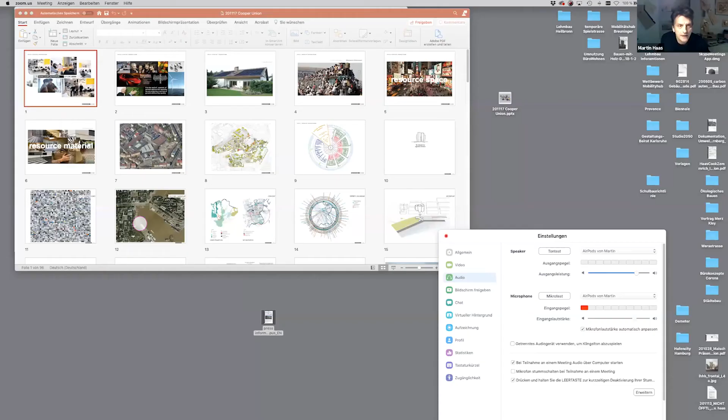Okay, trying to solve the technical issues. Do you see my screen? Yes, okay, it works. Before we start, maybe everybody could mute the mic, so Martin would not be interrupted. No, you can interrupt at any time you want.

So guys, first of all, thank you very much for the invitation, and thank you for organizing everything, Thorsten. It's a pleasure. I want to quickly speak about the office, what we do, how we approach things, and why.

Thorsten asked me about the 2050 in our name, Studio 2050. It's to remind ourselves that in 2050, all the governments have labeled the year when we should have achieved carbon neutral status for society. It's a big challenge—only 30 years left. When you hear about the issues we have to solve to focus on this aim, you'll know how little time we have left to proceed toward a carbon neutral future.

We have 3 partners, shown bottom right: David Cook, Stefan Zemrich, and myself. We have roughly 30 architects here in Stuttgart, and a branch in Shanghai, which developed out of a former student I had in Pittsburgh. He worked in the office and then went back to China. So we work internationally on sustainable architecture.

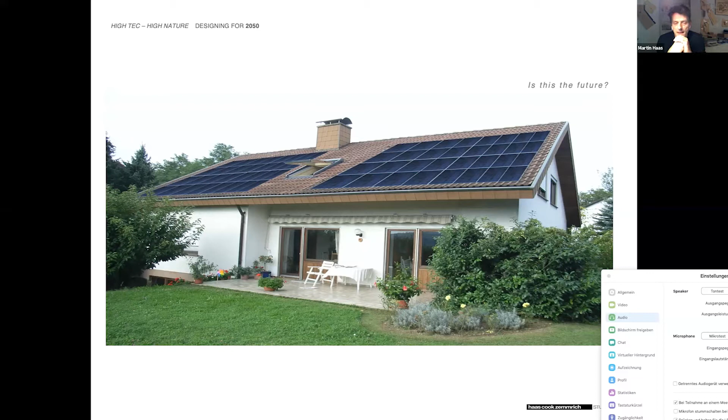I think in recent years we focused just on solving our energy issues. So we generated more efficient buildings, but we haven't asked ourselves if this building in general, if this single house, is the right attitude for this kind of society, or if we have to challenge the building itself before we transform energy consumption in a better way. These are big questions we have to look more deeply into.

So what does that mean for architecture? It means that when we talk about architecture, we have to address first that it should make sense to build the building, and it should provide usage for as many people as possible, considering 24 hours a day, 7 days a week. If a building is really used like that, then it made sense, and it was worth constructing. That's the effect of our buildings.

The first resource we have to talk about is space itself. We have one planet. We have only 2,000 square meters per person if we talk about 9 billion people on the planet. So we have to condense, and we have to use as little space as possible to provide as much quality as possible to people.

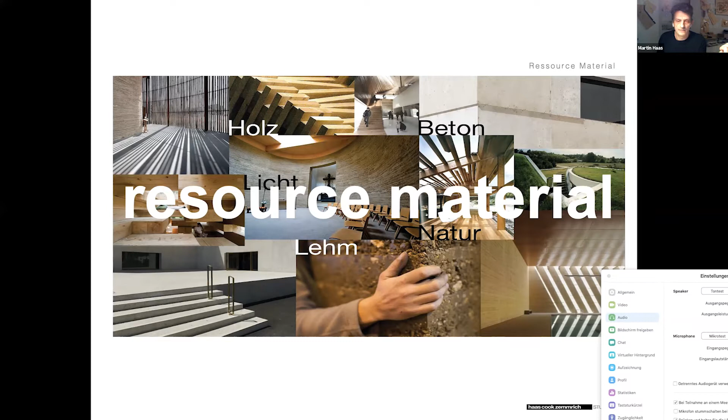So space, in terms of usage, and time, is for me a criteria for developing new architecture. And if you solve the first questions for a building - that it makes sense, that it provides as much attraction as possible to many people throughout the whole day - then it comes to how you realize it, to the materialization questions, and how to use as little materials as possible while dealing with the resource of materials quite well. I want to show you what that means.

We were asked to redevelop this former industrial site in Stuttgart. In all these buildings, which were asked to be demolished, there's so much embedded energy installed that it makes sense to question first and foremost whether it makes sense to deconstruct, or not to keep the building, to keep the structures and the embedded energy, and to gain extra value from that site.

So what we did was overplan the existing and redensify it, searching for new qualities by using all the roofs, using every square meter of space in different manners. A square meter of kindergarten space could be used for elderly people in the afternoon hours - we have a lot of shared communities, shared usages, to have a 24-hour, 7-days-a-week used architecture all the way through.

And if we add new structures, we certainly do that in a way that materials are better dealt with - so we use wood or renewable construction materials. All the rooftops are there for greenery, food production, microclimatic issues, to develop a better way of living in this dense urban environment.

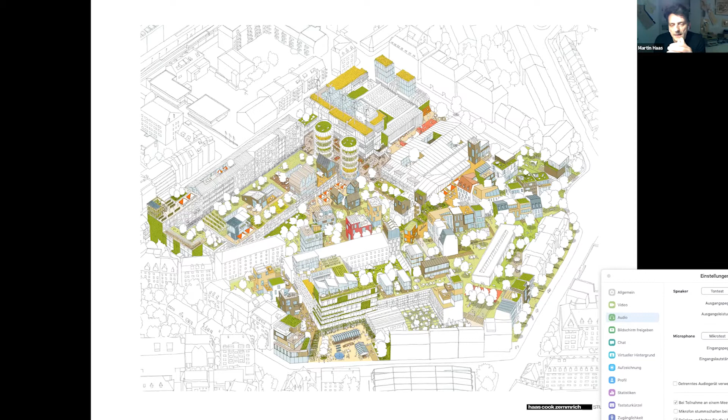Embedded energy, the usage of materials, the synergies of different structures - all of that needs to be considered. You can guess that this is a very complex approach, and therefore I'm happy that I was asked by Thorsten, and that I can share my lecture with Thomas, because I strongly believe in the integral planning approach. As an architect, that's a bit too much - you can't solve all these aspects as a single person. You have to work in a team with a couple of experts. I very much appreciate this approach, that we cooperate from the very beginning with Thomas and Thorsten to think through all these new innovative approaches for architecture from scratch.

As I started my lecture, there is this kind of different criteria we dealt with in the past about efficiency. We dealt at the very beginning only with the energy factor. Then we asked ourselves, can we reduce the amount of water? Can we reduce the amount of material embedded in the buildings? Can we reduce the amount of space we use? Can we reduce the mobility, or can we work with a more efficient, more sustainable approach into mobility?

That's the first phase, how do you say, the... Thomas, give me the word for that. That's the first phase of this holistic approach into sustainable architecture.

But when it comes to a carbon neutral future, we also have to address the way we live. So it's not anymore anything we can just plan. It's also the way we share, we deal with the structures. It's the question of how much, where the food is coming from, how do we deal with our travels, the consumption of materials. So you see easily that when we talk about a new approach to a carbon neutral future, it's also a question of ethics. It's the question of how we can steer our social environment in a better way.

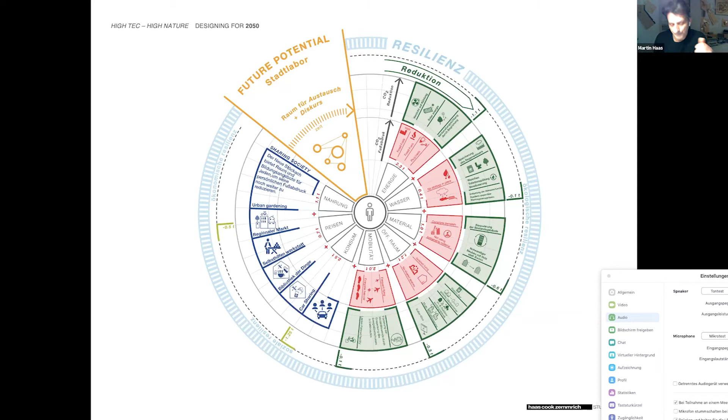How we approach that when it comes to a building: we were lucky in a submission for a competition asked by the Guggenheim Foundation in Helsinki, to team up and finalize in the last round of six architects. There we first searched for the possible dimension of a building at the site at the harbor front of Helsinki, because there the Guggenheim Foundation asked for a new museum, and they reserved a huge part of this existing industrial harbor.

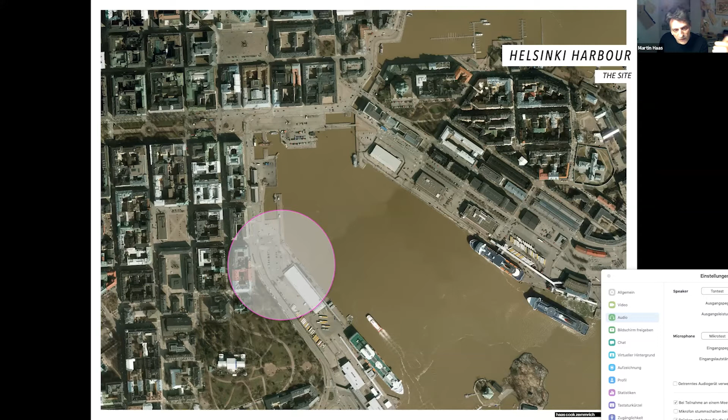We said, does it make sense to make that building like a museum, which is also just a 9-to-5 usage, or would it make more sense to shrink the place for that museum and allow the city to grow in future in different ways, because nobody knows what the future is asking for. So maybe it makes sense to shrink the place for a museum to allow the city to develop in other ways in the future. So we also searched together with urban planners for the need of additional features in the city.

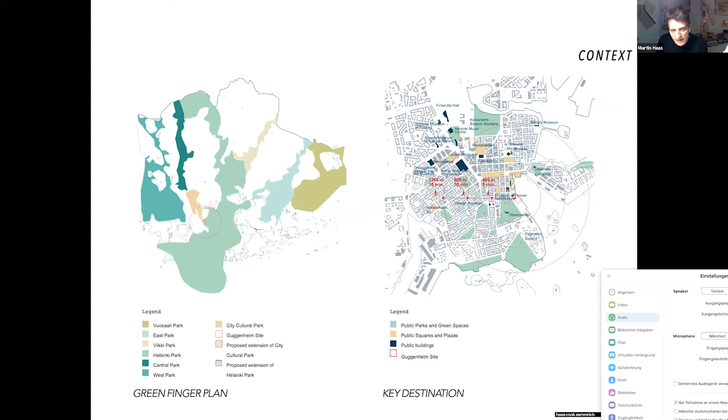We said, what kind of qualities can this museum provide beside being a museum for art? So we looked into the event calendar of Helsinki over a year, and we realized it would be an additional quality if we could address an open public space accessible for everybody, not only for the museum's visitors — a public place sheltered against the strongly easterly cold winds in Helsinki. It's quite a cold place in winter times. They hardly have sun, so they celebrate the spring period when the sun is coming back.

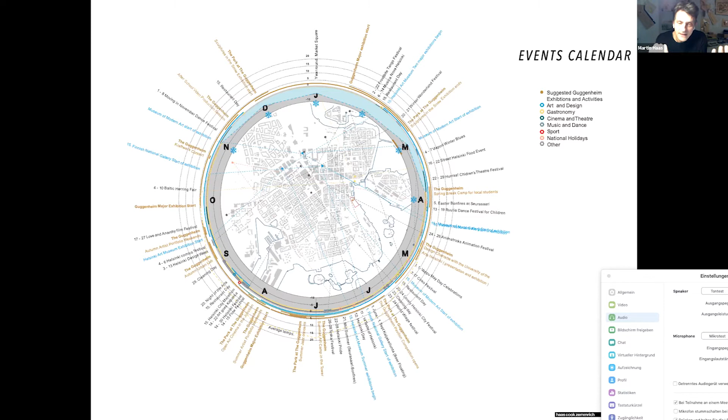So we said it would be great if we could provide a place where they can celebrate the beginning of spring, have a sheltered outdoor area with a lot of solar hits, celebrating the light as a quality, because light is a missing quality in that city.

There we focused our design on shaping the museum into high tower structures to shrink the footprint of the building, and then the towers themselves, the single tower spots, we modulated in a way that we have solar hits through these towers into the public space in the middle of that solar henge. So you see it here.

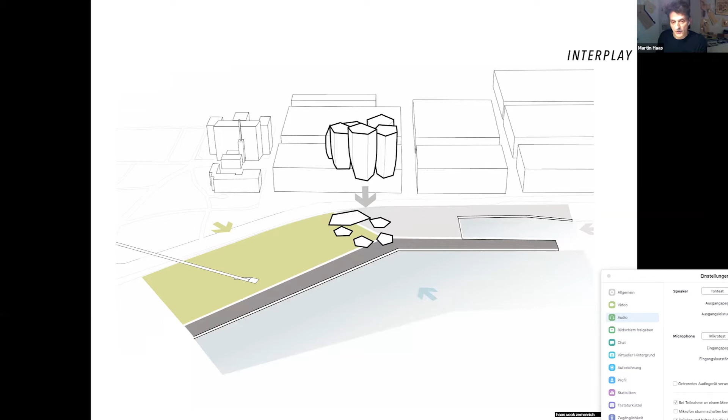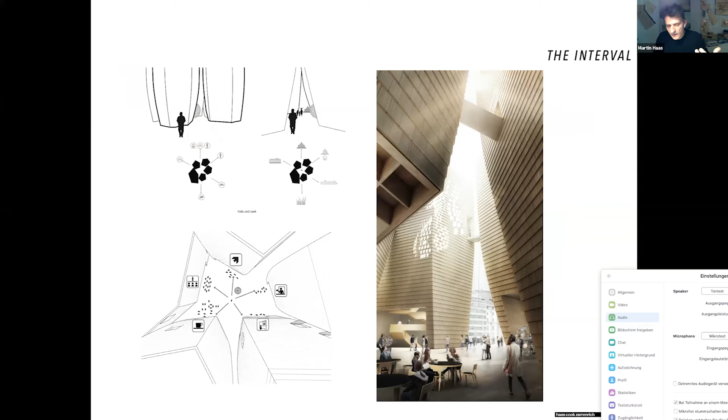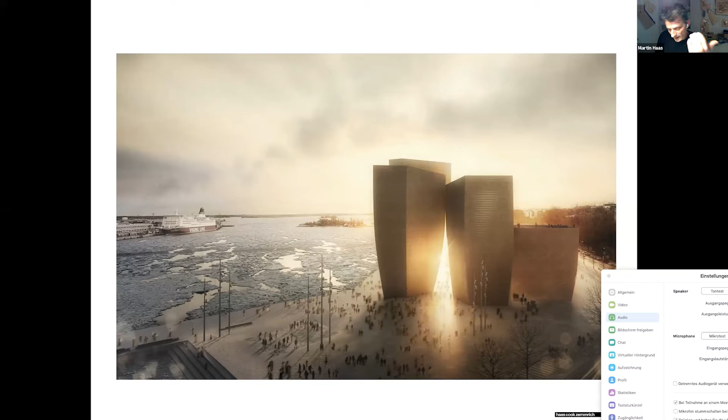Then we said, okay, we produce this place, a public area, a place for gathering, for interaction, and we generate a kind of chandelier in the middle where solar hits can celebrate lighting conditions, allowing for these kinds of situations. That's an image from the 21st of March, the beginning of spring, where a festival of sun could happen at that place. We searched for different qualities we can provide beside the museum. So we asked ourselves, what would we do spending 24 hours around that building, providing viewing platforms.

We had a garden next to the museum, providing extra space. The garden was an area where the city could develop differently in future. So it was all about reducing the resource of space, maximizing the usage of that building.

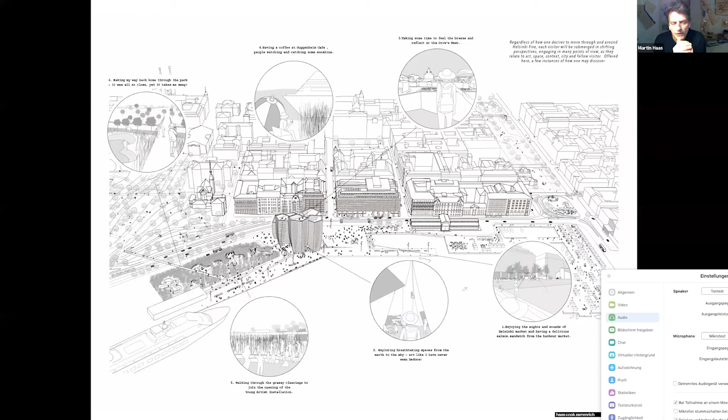With that came an approach where we wanted to develop towers out of wood. We worked on a very innovative wood structure together with Thorsten and his team, wanting to show society that a 45-meter high wood tower is possible.

Inside the museum, movable platforms allow artists to reshape the areas, because I believe that I'm an architect—I only have one brain, so it helps to ask artists to change the room layout over time, to provide as many different room atmospheres as possible. It would be great if artists could tell me the platform for their exhibition should be on level 1, and for the next exhibition we want a smaller space. That was part of this vertical white cube, or wood cube, providing an extra venue for exhibition.

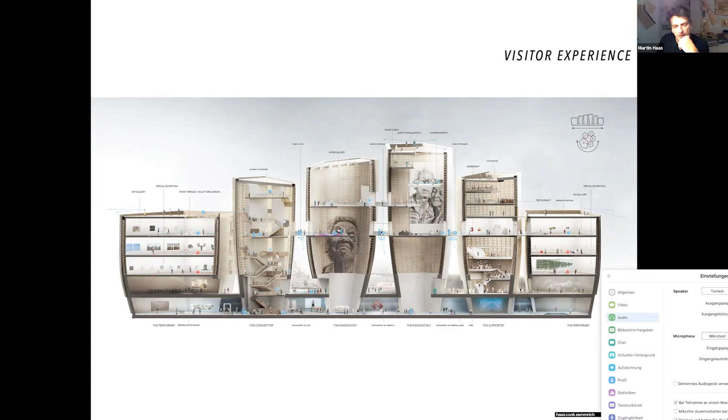So when you solve the question properly, you produce a space which could be used by different persons. When it comes to materials, we also realize that natural materials have two positive effects.

The first is certainly that we save resources, but the second is that they generate an emotional link to people. People like natural materials, they know them from nature. It's a very old, basic kind of relation you have with all the elements you see on a daily basis. This emotional link helps very much so that people appreciate buildings. I think for a sustainable approach, durability is also a very important aspect, and durability means that people like the buildings and want to keep the structures for a long period. That's something we shall not forget—natural materials can provide this emotional link.

When we develop houses, we ask ourselves first and foremost: what would we do if there wouldn't be any energy at all? It's a very simple approach—all architects for the last 2,000, 3,000 years worked like that. But we forgot all these passive measures about orientation, the right placement of a building, the amount of windows we need for daylight without solar heat gain, and what it means to protect against the rain. That is the new simplicity we very much like to approach with.

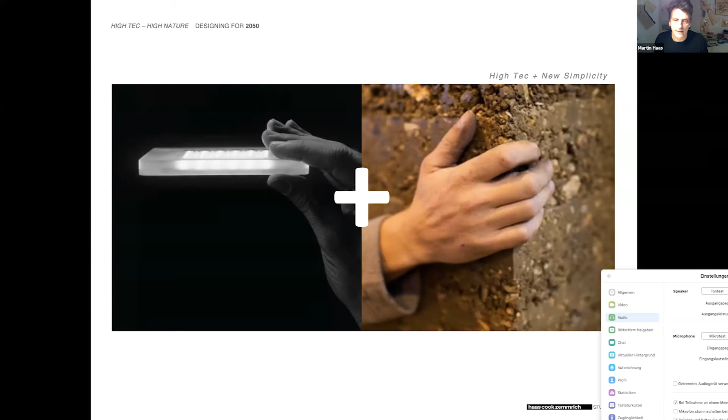That leads us to Alnatura, the building we want to talk about, because all these aspects I mentioned were embedded in this approach. We had a...

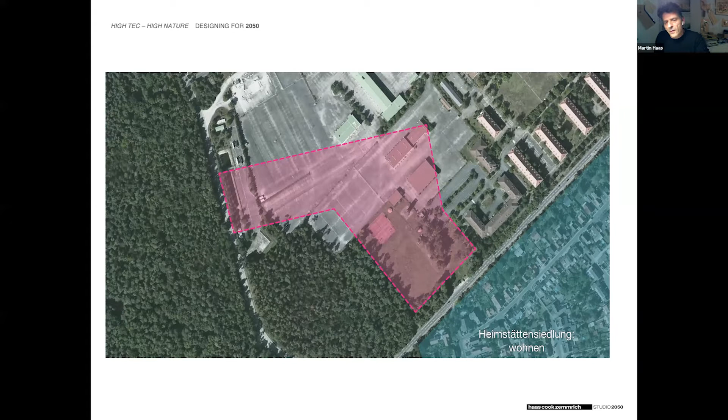The site is in a midtown area of Germany. It was a former military camp—you can see the paved structures, the military barracks, here. It's in the perimeter of a city, close to a forest. Transforming a former military site in Europe is a very big thing right now, because you can densify cities and stay close to all the infrastructure facilities the city provides. It's a plus, and it's no longer in use. We appreciated this approach very much.

Our first consideration was: if that is the site, let's figure out what we can build there, maximizing use of the microclimatic conditions we find in the immediate proximity. How can we reuse what we find on site, and how can we maximize our carbon-neutral or microclimatic qualities back to the area?

Wait a second, I have a technical issue.

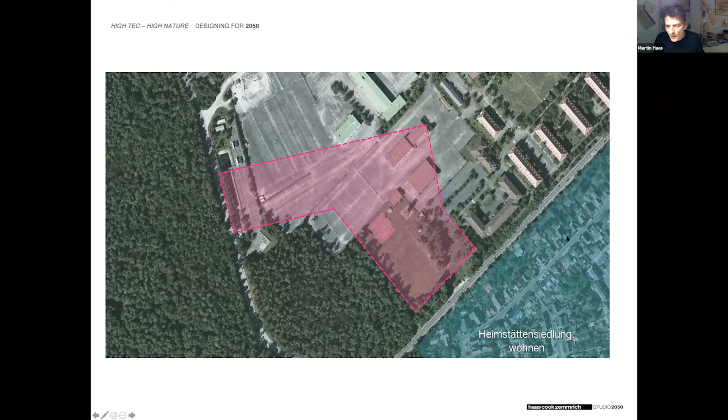We started with a simple fact sheet. We said, okay, let's base everything on a couple of aims, of targets: optimized use of the microclimatic conditions, and the choice of materials through a process of life cycle analysis.

That was something we couldn't do ourselves, so we were happy that Thomas and his team at the university in Munich helped us develop criteria for designing an optimized building envelope, resulting in reduced consumption of materials. That's also something you can't do yourself as an architect - you have to have a good planner aside, and that was Thomas and his team, also energy consultants.

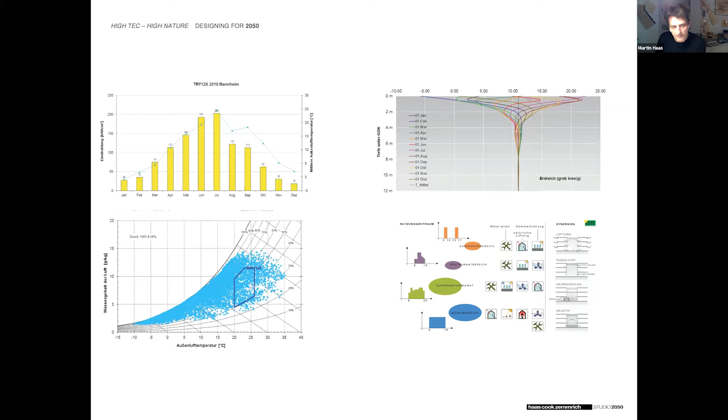Employment of natural and renewable building materials - it sounds simple, but it wasn't that simple. Thomas will talk about that in more detail, so I'll go over it. We looked at what kind of potential we find on site: solar hours, geothermal potential, etc.

We did a couple of different model approaches with all these criteria embedded, and we finally ended with a very simple barn approach - a simple structure oriented east-west.

The reason for that was we wanted to have maximum north light. North light is good light - it's an even light, less solar hits. The main issue for a working environment area is you always have so many energy materials, computers, a lot of heat gains in the building. So you want to have as little heat as possible, and maximum daylight in order not to turn on your artificial light easily. So north light is good.

Therefore we cut the roof - you can see that in this working model. We lifted the elements, the levels, to have a high level. The high level allows maximum daylight to hit the depth of these plates, giving a little envelope with maximum usage of square meters under high potential daylight conditions.

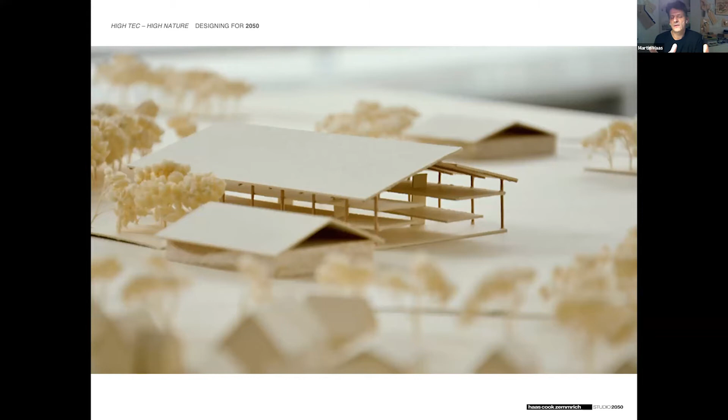Then we started working together with Thomas and with Thorsten to work this conceptual, diagrammatic architecture into detail. We said, okay, we use the air from the close by forest on the western side. A forest is a perfect clean air venue - in the summer the leaves provide shade, evaporation cools down the air. So we use that, and we suck in the air and bring it to an air duct.

You see the air duct in the diagram at the bottom. We bring it to the inside of the building, then use the natural chimney effect in the atrium. What does that mean? The air gets warmer, warm air rises up, and therefore we have a natural movement of fresh air brought into the building by no other means. So that was the air duct and the natural ventilation aspect.

Then we said the south-orientated roof is perfect - we can use that for photovoltaic cells so that we can provide our own energy on site. Then we said we'll save and store every cubic meter of water we can get on that facility, and we put that in an open lake on the south side of the building.

The open lake helps cool down the area further. Through evaporation we can influence the microclimatic conditions, especially on the south side where we have a lot of solar gains usually. The green part gets very close to the house, so we get rid of paved structures as much as possible - also a microclimatic enhancement by not having too many paved surfaces.

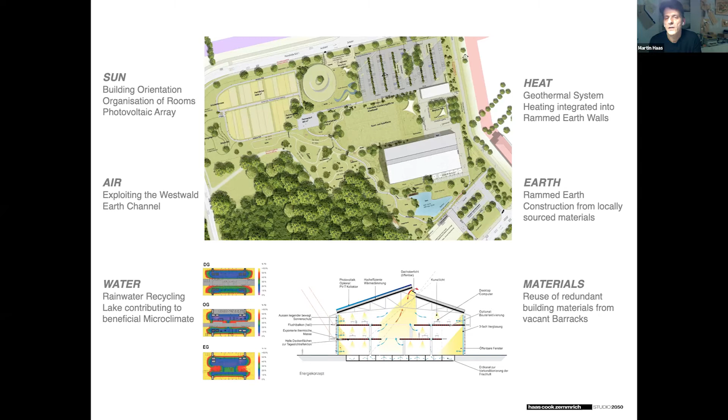And for the heat, we could use the geothermal on that site. We have the average temperature storage in the earth 10 meters below, roughly 10 or 12 degrees. So it's a very good stable heat we can use in summer to cool down and to enhance that with heat pumps in the winter to provide heat.

When everything was solved, it came to the aspect, how do we build that? So now we have the structure, we have the barn, we have the light, we have the air. It came to what kind of materials we can use.

And if you look on the left chart, you see that's a classical office section you have in every conventional office. You have the structure, you have a raised floor, you have a raised ceiling, you have a lot of layers in the facade. And it ends up that you provide only 2/3 of the construction materials to the people. 1/3 is only there to shape and provide technical elements which you need to install in the second ceiling or on the raised floors.

It would be better to have a monolithic approach to provide every square meter you build to the users. That is the right chart. Simple roof, simple floor, a monolithic facade which should be durable. This base and shell of everything is for me then the passive, simple room which could be in use for centuries, because whatever you install then in technical means could be redone, but the room itself is, on a human scale, a usable room for the future.

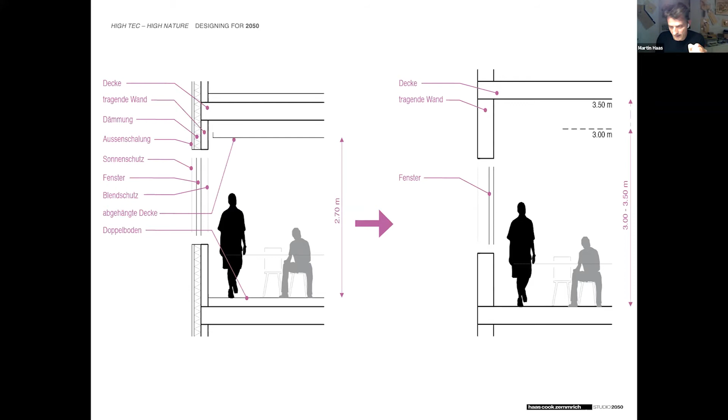So then we looked at what kind of materials could help us with this approach. That is a life cycle analysis we did with the University of Munich, where we checked various materials for embedded energy, efficiency during usage, and then the end of life scenario.

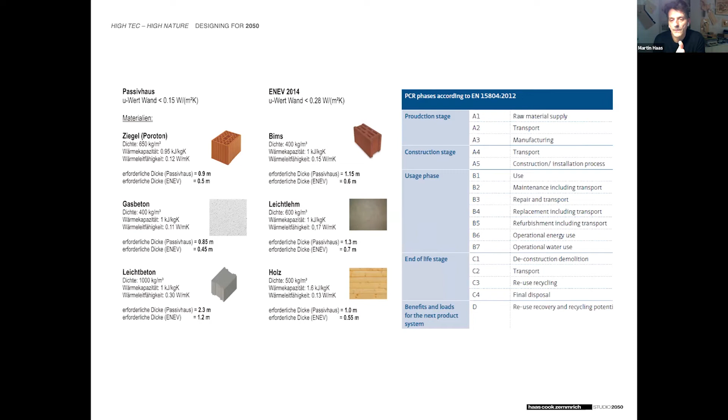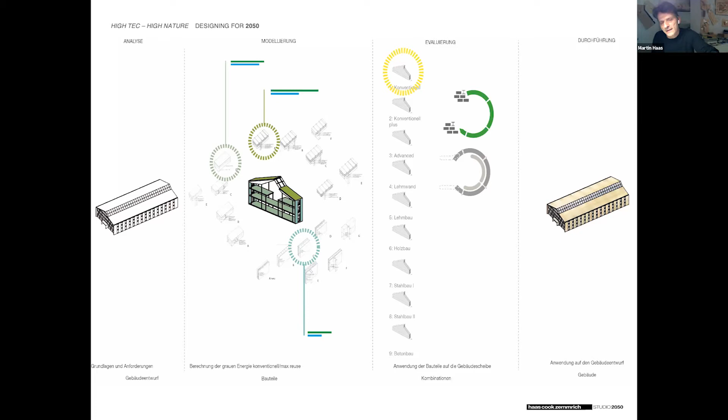Easy to say, it was not that easy. We put it roughly into various slices. We cut the building and we checked the embedded energy factor and the life cycle with different materials. Finally, we ended up concluding that using earth would be a great thing.

Earth does have so much possibilities. It's available everywhere, it's a renewable resource, it's so simple. It was in use for centuries, but we completely forgot that we could reinstall that also in highly industrialized areas. When we started with rammed earth, with loam, I hadn't had a clue about loam. As an architect, I read a couple of books, but I was not informed in that way.

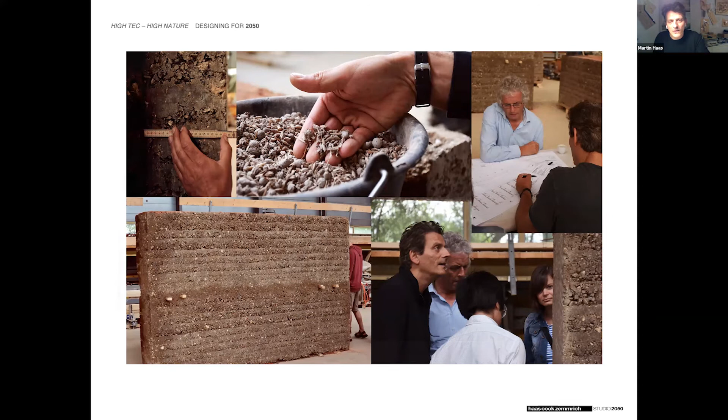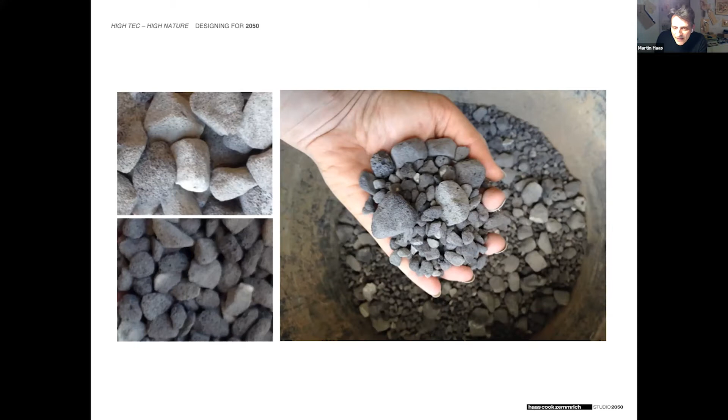So we checked a couple of materials, we searched for possibilities of how we can install insulation in that wall. We came up with the insulation using a recycled material from the glass industry - a kind of glass gravel, which worked brilliantly together with the loam. And finally, we ended up with a production method on site, using the former tank barrack for the loam earth brick production. And the innovation in that very old material was that it was finally completely engineered.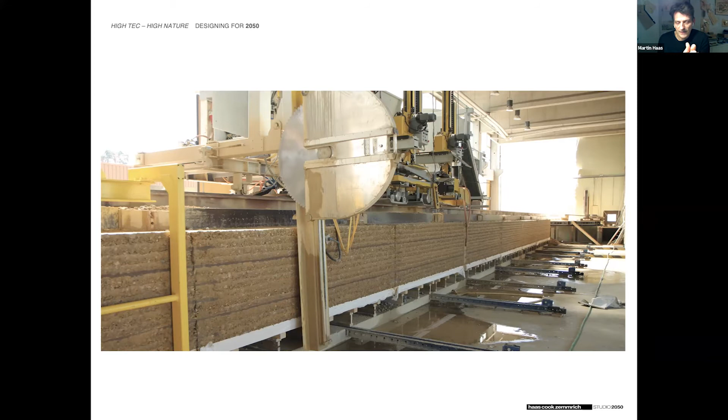Because in that wall, you have a water piping system. The water pipes are connected to the heat pump and to the geothermal device. Therefore, we have a kind of heating embedded in that rammed earth element. You see the darker lines in that rammed earth — that's a lime and trass stone mixture, which protects the loam against erosion. So it stops the speed of water coming down the wall.

We produced on site — you see the sizes of the elements, 3.5 meters, so roughly 10 feet, by 70 centimeters, which is about 2 feet.

We needed to try them out for 3 months. We had a lot of discussions with the client about durability, and if you introduce a new material on site, every client asks you: do you have references? Is that something which is stable? Does it last for long?

Luckily enough, there was a building in the Zoo of Basel where this kind of construction was west facing for 20 years, and we could look at it and see how tremendously the erosion didn't harm this rammed earth for 20 years.

So that was the situation when the client was completely convinced. But the client was not a hindrance — he was someone who forced us to go into this area of carbon neutral building, because Alnatura is a big name in organic food here in Germany, and they very much liked to have a building which stimulates and helps and shares the way of thinking they have about a holistic view of sustainability in the building itself. So they were also drivers and asked us to develop these elements.

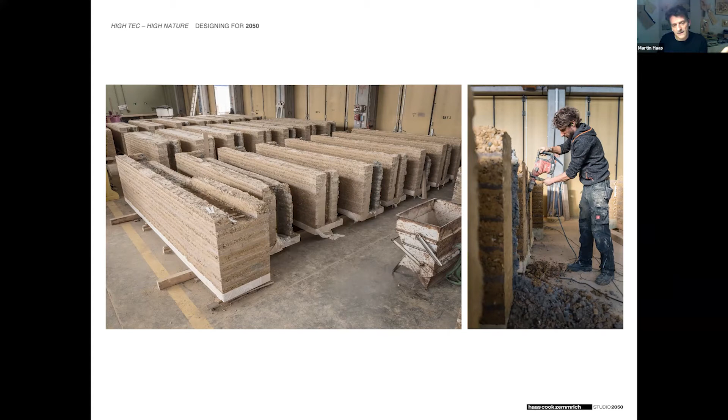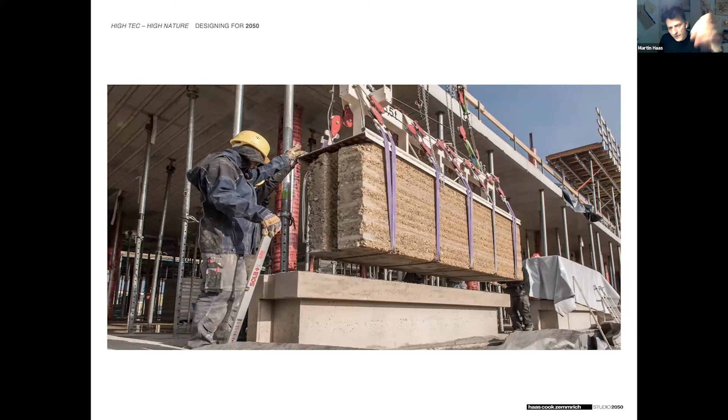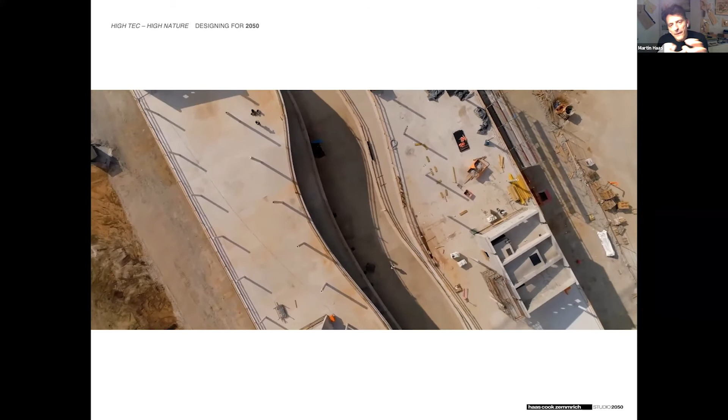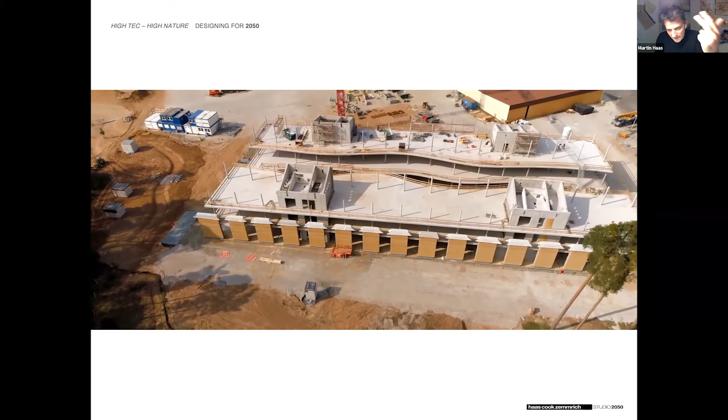You see how it was brought on site after 3 months of trying out. You could stack the 12-meter high columns of this rammed earth. In this little movie you can see the big difference between the inside and outside, because we said, okay, we have a shell. The shell should provide as much shelter as possible against sun, wind, water, but on the inside we wanted freedom of space — a modern kind of working environment.

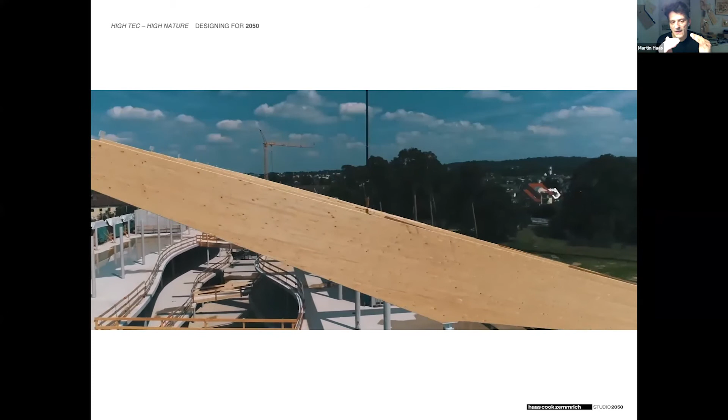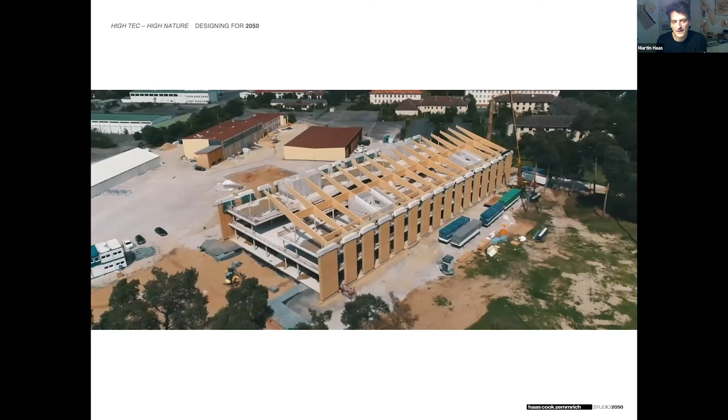On the roof, something Thorsten will tell you in more detail, we had a wood construction — two single wood elements not connected in the middle. I need to say these two wood elements were probably more sophisticated in design than the rammed earth facade, because that was not simple. You see the little columns — thanks to Thorsten and his team — something that tremendously worked out nicely.

The building looks simple, but it wasn't simple at all, because all the engineered elements you could not see. The simplicity was something we wanted as a final result. But I have to tell you, that was a 2-year, really demanding run to come up with this structure, because a lot of things were developed for the first time in that building. Fire protection, everything was unsolved at the very beginning, so we had to deal with the authorities here quite heavily.

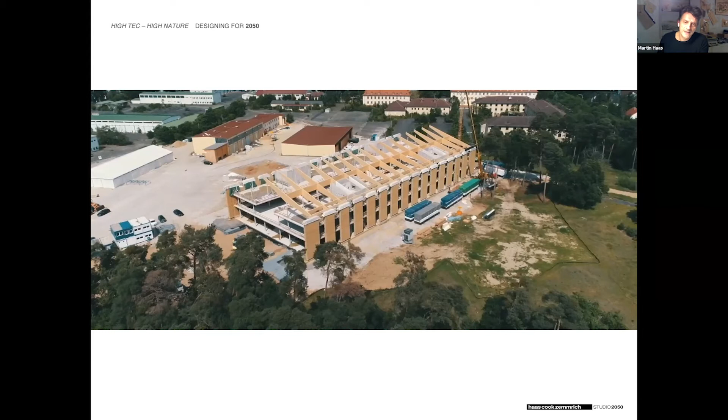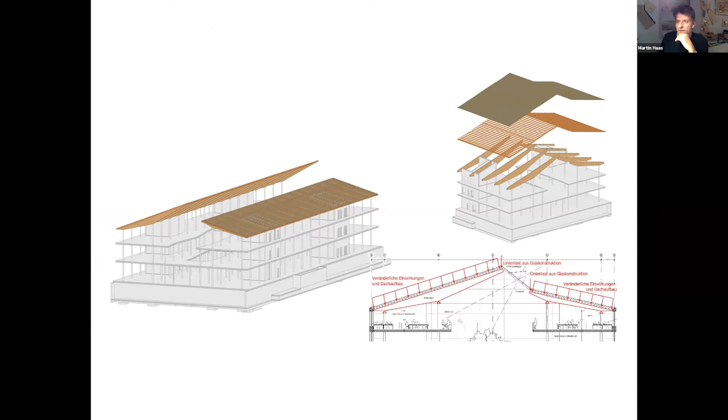I'll go over the wood roof briefly. Thomas is the expert — he will talk with you about the wood construction of that building in more detail, I guess. So allow me to go quite fast over it, because I'm also consuming too much time.

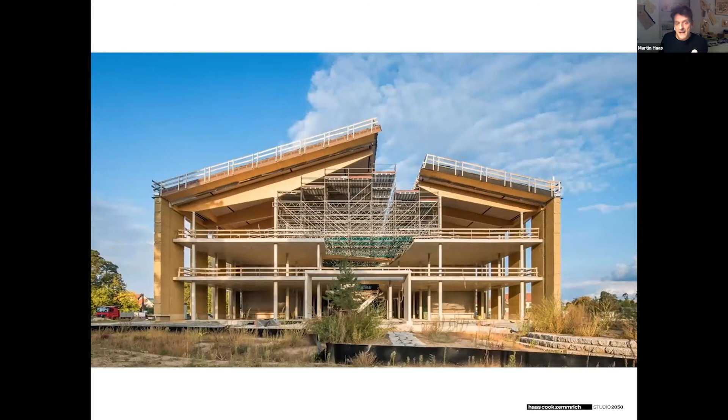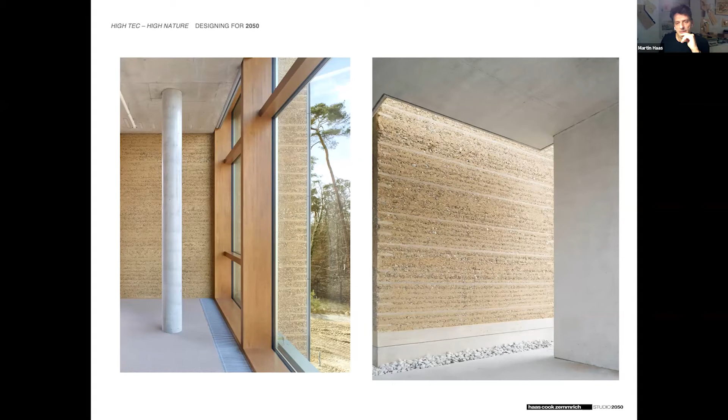That is what I said — an emotional link to the people. They very much appreciate the house. Now we have the 3rd summer where it is in use, and we had some harsh summers the last 2 or 3 years, so we can realize how easily that building works. The rammed earth is a perfect regulator for humidity. It works acoustically. It provides such a nice air quality inside. It's a natural material people appreciate. So I think it was very much a success for the people working in it, but also for the client himself.

You see inside, the last image I show before I hand over to Thomas — it's a different world, not anymore that traditional. We very much like this aspect and the two different criteria of the house: a modern working environment with traditional materials, finally in use as a carbon neutral building, hopefully.

Lastly, I think you see the concrete here. The concrete — if you would need concrete, or if you would need to produce the slabs in wood — that was a difficult question we treated ourselves quite often.

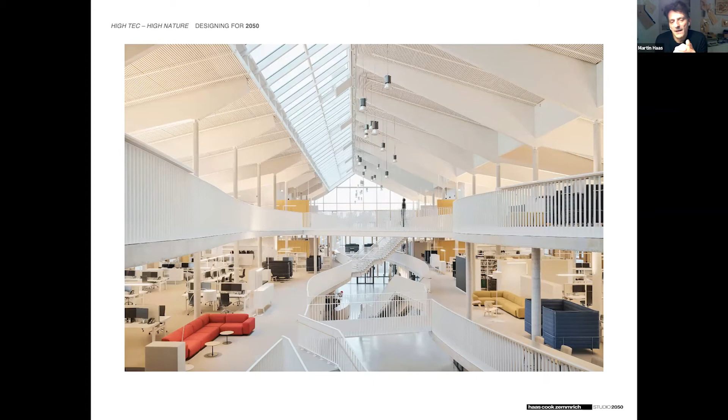And most likely, if I would rebuild again, or redo it again, I would also construct the ceilings in wood. I think that's something we learned from the Alnatura lesson, because we also learned that energy consumption for transportation to bring goods to a site is a tremendous energy aspect you need to deal with. To have a really carbon neutral approach to buildings, you should build as much as possible regionally from the site, and most likely not in concrete. Okay Thomas, that's from my side.

Thank you. I hope everybody's awake.

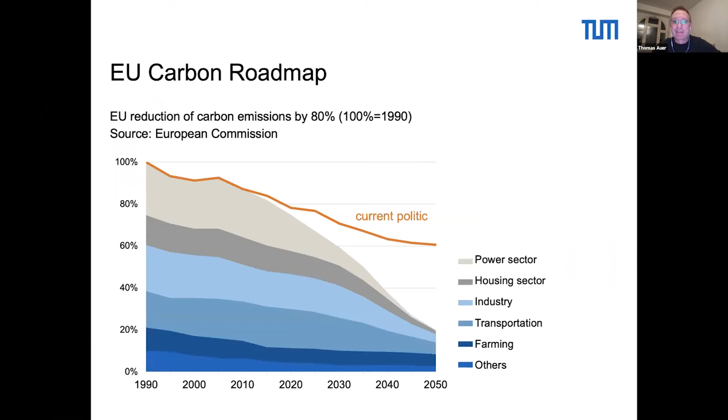2050, Martin has talked about, I can jump over it. That's the European EU carbon roadmap. The European Union basically promised to the world that we're going to reduce our carbon emissions by 80% until 2050. That's where we are. The housing sector basically has to decarbonize in this strategy. So not only new buildings, not only Alnatura that Martin has shown, but basically the whole building stock. If you look outside, everything you see should become decarbonized by 2050. That's a huge challenge. We don't know yet how to get there. There are different strategies. I think it's doable, but it requires a lot of research, a lot of effort, a lot of ambition.

But I think it's changing our built environment to a certain extent. And that's why it's so important to get architects involved, because architects design our built environment. Don't give it up. Don't hand it over to the engineers. We might wake up in a world we don't want to live in, and in cities we don't want to live in. So it's a design task. We have to design it.

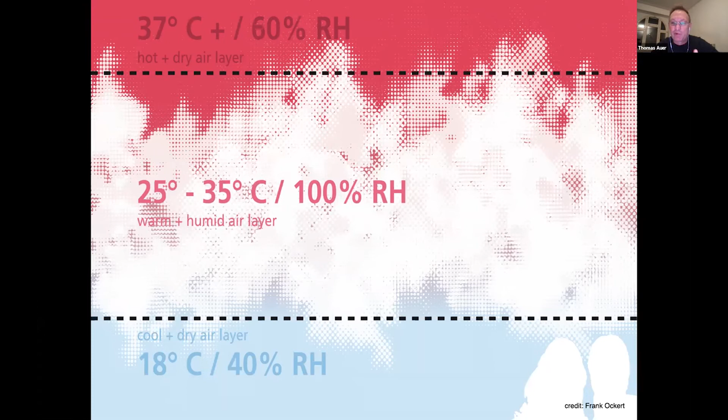Warm, humid air has a lower density than dry, cold air. So this layer of warm humid air floats on a layer that is cold and dry. To avoid the cloud touching the ceiling, which would cause condensation and make the cloud disappear, there's a layer above that's hot and dry, again reducing density. So it's only a game of densities — we reduce the density of air in every layer from bottom to top, and we get floating layers. The reality is a little more complicated; the physics remains the same, but achieving these stable layers took us a while.

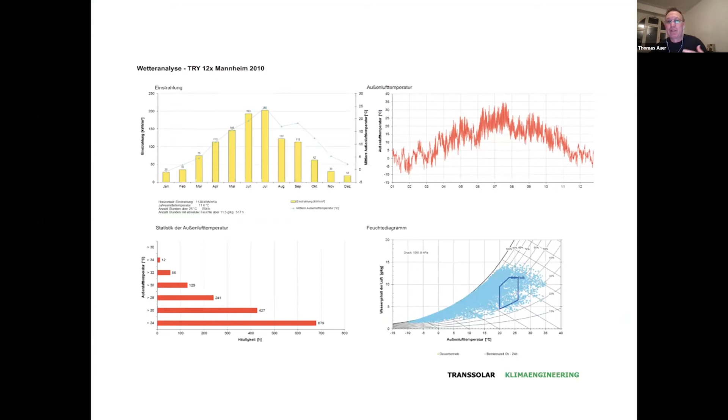This is the climate analysis — this is what we do. We look for hourly climate data to get a good understanding of local climate conditions, to see the challenges and opportunities. We look at temperature, humidity, solar radiation, wind speed, and wind direction. We study all this hourly data from each location to get a better understanding of the strategies we can use.

This is the section Martin has basically shown already. We have this radiant system for heating and cooling embedded in the rammed earth wall, a geothermal system below the building, and a heat pump that provides radiant heating and cooling in summer. Most importantly, the building is based on natural ventilation, passive cooling strategies, and humidity control by the rammed earth walls. All these passive design strategies mean the mechanical systems shown in this diagram are only supplemental — we only use them during extreme seasons.

All the exterior offices rely on natural ventilation — they open the window most of the year. What was also very beneficial for our design was that the client decided there would be no partition walls.

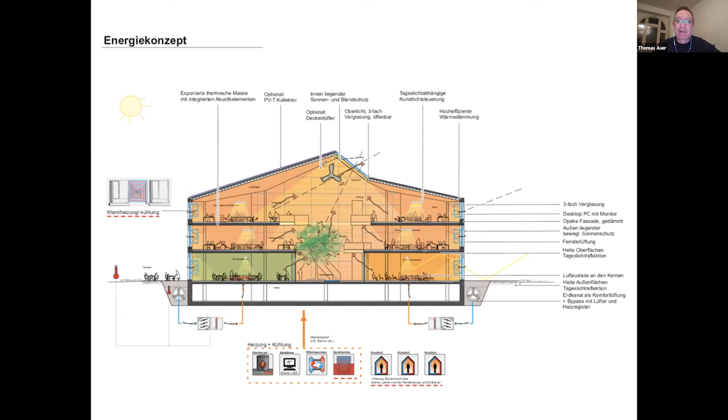Above the ground floor where all the offices are, there are no partition walls. We have 4 cores coming up, and in the center of the building we supply the air from the core. There's no horizontal distribution of air supply, just displacement ventilation coming out of these 4 cores. The whole office is one open space, one room. It's a 1-room building, everything above ground floor.

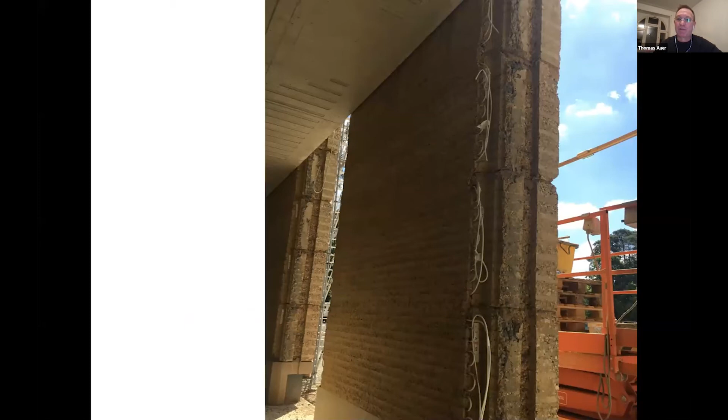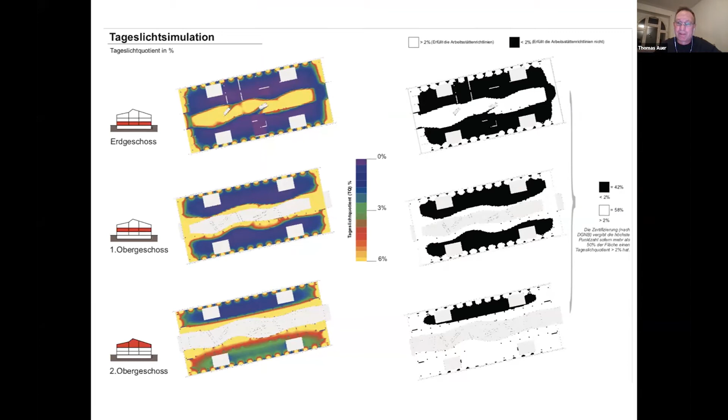Then the daylight study, where we could prove that with the skylight and the open character of this building, the atrium in the center, we get good daylight conditions throughout the building. You can see it already in the pictures and visuals, how good the daylight inside the building is.

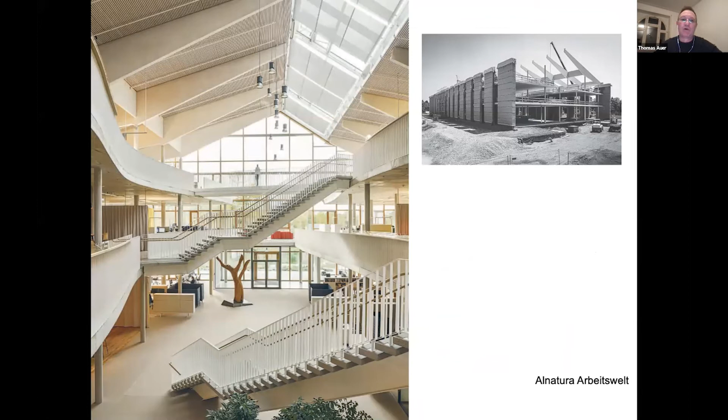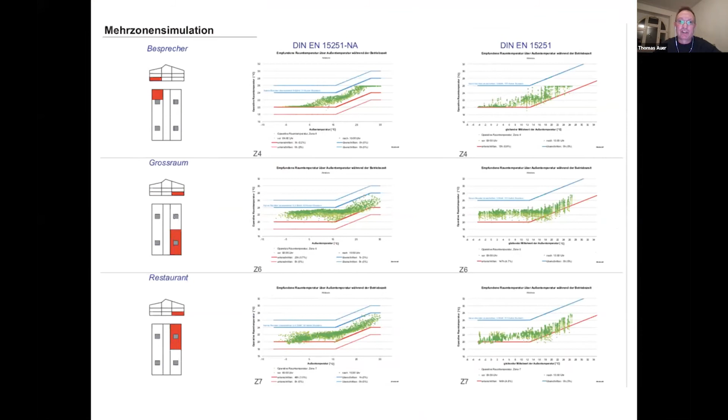We did some monitoring. This was modeling showing that in all the different areas we get decent comfort conditions. We do have some issues with the BMS, the building management system, but these are measurements we've made throughout a whole year. You see it in these different diagrams, and I won't go into all the details.

I want to focus on maybe 2 diagrams. Here's one that shows in red the temperature outside, and in green and blue the 2 temperature zones where we have sensors on the inside. One is pretty close to the eastern facade, one to the western glass facade. We had some issues with the BMS there.

The gray here indicates the comfort band. In summer, we exceed the comfort band on a couple of days — that's when we had issues with the shading controls. But you also see that even in wintertime we still have too high temperatures, significantly above 20 degrees in periods, sometimes going up to 26. 20 is about 70 Fahrenheit, 26 is about 78. So it's a bit too warm in wintertime.

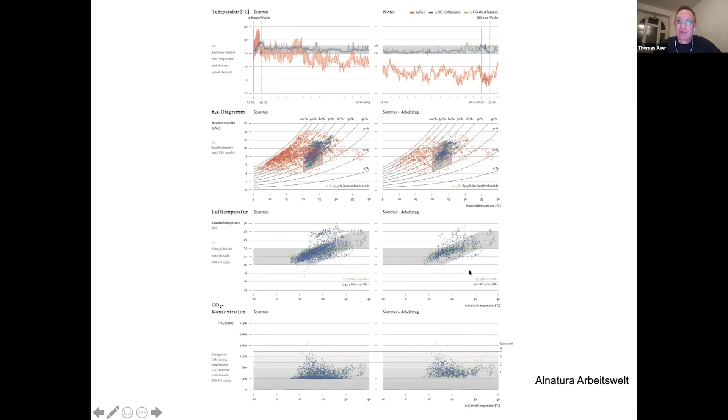Now, what's interesting — let's go to the next chart, this is most interesting for us. I know we're engineering nerds, we love numbers every once in a while. This is humidity, and it shows us to what extent the material really controls humidity. Here we look at absolute humidity, or water content of the air, measured in grams of water per kilogram of dry air. I know you're used to thinking in relative humidity, but that's hard to compare, so as engineers we love to look at water content.

You see red for outside and blue and green for inside. Here, for instance, you see those peaks and the gray band in which we want to stay to have good indoor relative humidity. You see those peaks and how they are cut — we take about 3 grams of water at these peaks. The material absorbs about 3 grams of water per kilogram of air that goes into the building, into the material, and then it releases it back out at nighttime.

We see the same effect in the other direction in wintertime. Here's how dry the outside air is in a cold period, and we see a delta of about 2 grams that the material contributes to the air, so that inside we could stay at 30% relative humidity. So with these diagrams, you see these deltas coming from the rammed earth wall and how we can use material for controlling humidity.

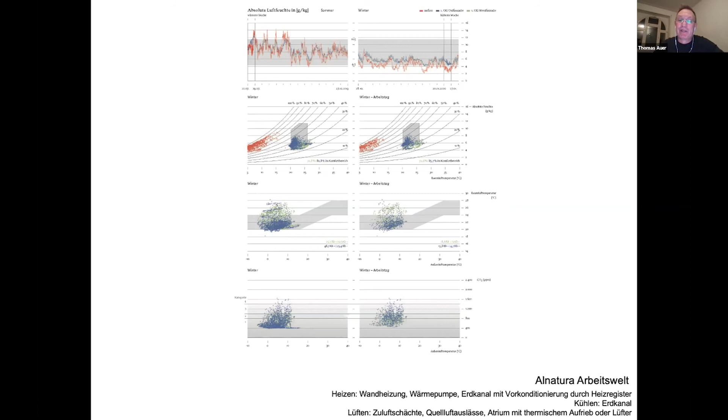And then also, I think that's also something very important: it was measured in terms of indoor carbon emissions, so-called VOCs, volatile organic compounds. Those VOCs come out of materials, glues for carpets, paintings, but also out of furniture.

So to what extent you can reduce VOCs - and people always talk about CO2 in indoor environments, but nobody cares about it. CO2 doesn't matter to people. We use CO2 as an indicator only. CO2 has no influence on well-being of people. What we recognize as bad air quality are odors, mainly from people, but we can't measure odors, so we measure CO2. We only measure CO2 because we can. There's no real reason in measuring CO2.

Odors are, let's say, very subjective, and human perception is the only sensor we have for odors, for air quality. So we should rely on human perception more than on sensors.

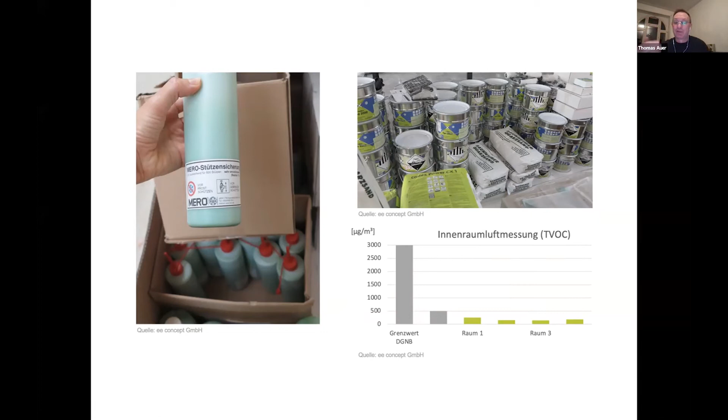What's really critical in terms of healthy environments are VOCs. Here you see to what extent we can really reduce VOC emissions in our indoor environments. This is important because we believe, not sure if you've heard of sick building syndrome, that VOCs have a very close relation to sick building syndrome. So this is a big progress, very important.

So finally, talking about the rammed earth wall, we got some research grants from the university to study how much energy goes into the construction of a rammed earth wall. We measured all the energy used - Martin Rauch used on site, all the power going into this warehouse, but particularly all the trucks.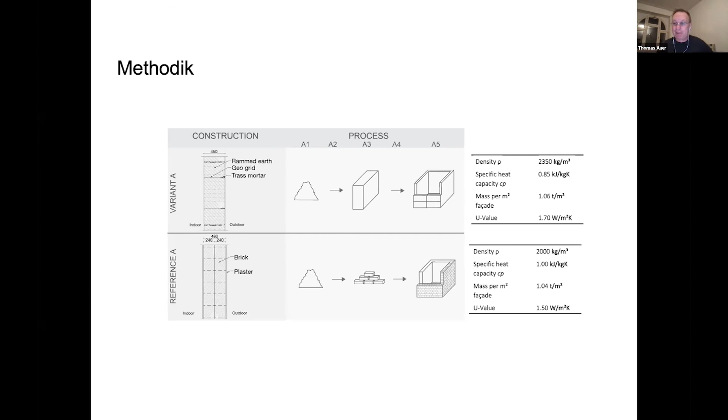For a specific reason, the rammed earth material was coming from a 220 kilometer distance. I'll make it fast, but we compared it to a reference. What we figured out was the result during design, using data from a database, and we also compared it with another rammed earth building in Switzerland, for Ricola.

I'll jump to the final result. What we figured out is that transportation of this rammed earth led to the fact that our wall, at the end of the day, is not any better in terms of embodied energy compared, for instance, to an insulating brick wall. It has other beneficial properties, but in terms of embodied energy, this transportation messed up our whole energy balance.

Up until then, everybody thought transportation wasn't that critical. We showed with this work, and it got published, that transportation is critical.

So the conclusion was - sorry for the confusion - variant A is the Swiss building where they used rammed earth from the site itself. You see the comparison between the rammed earth facade and a reference facade. Whereas in our building, with the 220 kilometer transportation, we are worse than the reference.

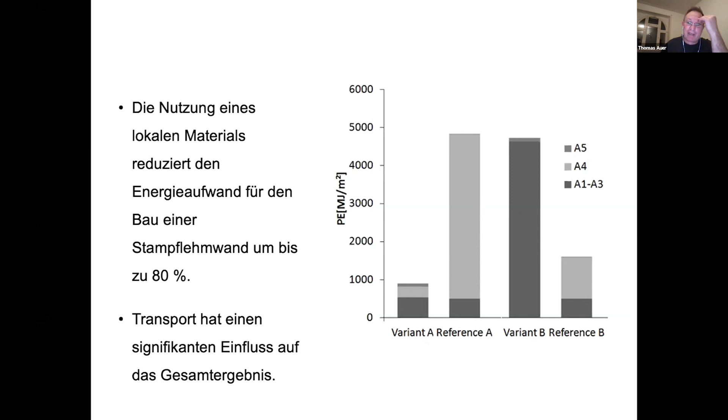Transportation is critical, is crucial. And that's why we published it. Even the client loves the fact that we published it. Nobody is criticizing that we did it, because this is what research is about, to create knowledge and to share this knowledge. Without this building, this knowledge would not be there.

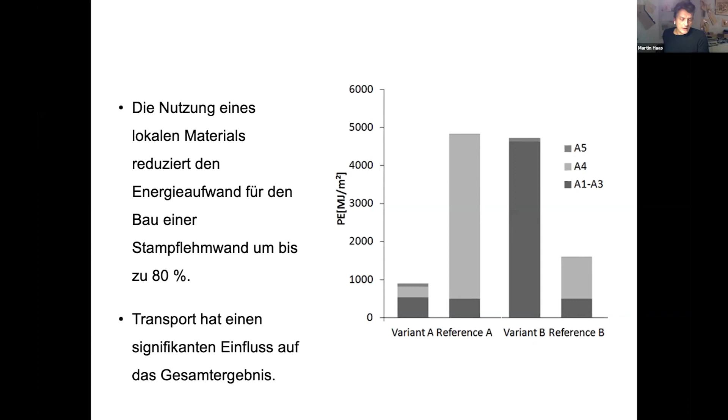I think this becomes more and more an important aspect. We had a commission in Bremen, in the north of Germany, for wood construction. They asked us, does it make sense to build here out of wood, because the closest forests are a bit more remote than in southern Germany. And that's how it comes to this aspect of transportation.

As Thomas said, the outcome of this research was that the aspect of transportation embedded in the technology in Germany is around 9 to 9.5% in the Ökobaudat, and it's way higher in reality. So every consideration right now where you talk about embedded energy is more or less based on wrong assumptions at the moment.

So transportation matters. We have another project, a rammed earth construction in Hamburg. The first thing we did there is search for close proximity of loam. How far would loam be in distance from Hamburg? Would it make sense to build a rammed earth facade over there?

As Thomas said, for us the innovation aspect of Alnatura was you have to start with something to learn about the values and about these aspects. And we were lucky enough to have a client who was reluctant yet positive about the potential failures we could encounter with this kind of innovation.